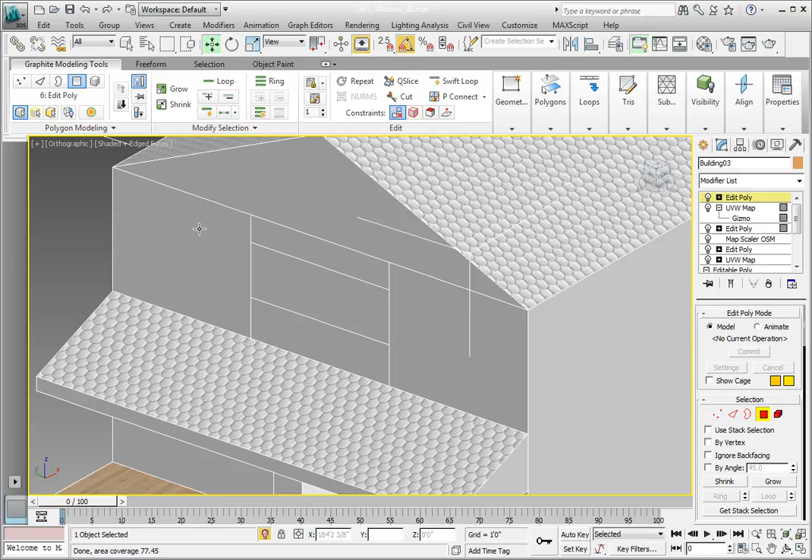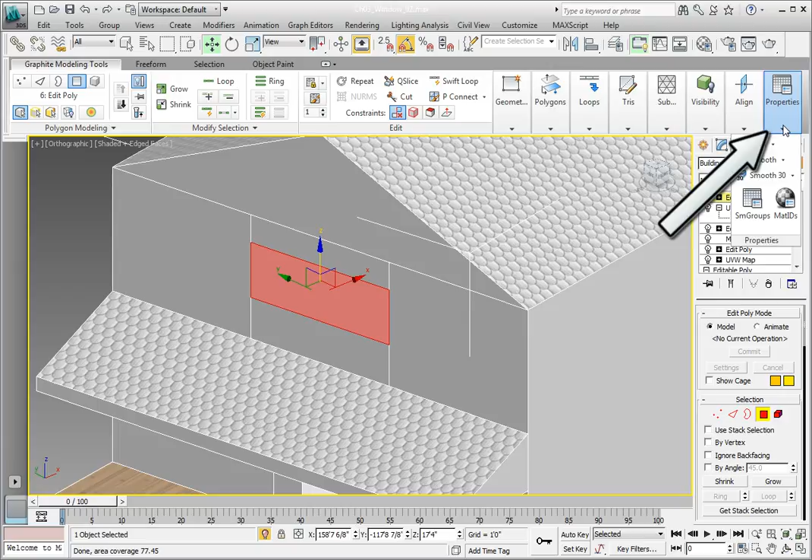This polygon is going to get a different material. Remember, we assigned all the polygons in the building a material ID of 1. So we will change the material ID for this polygon. In the Graphite Modeling Tools Properties panel, click the down arrow in the Properties title bar and click on the Material IDs option. We might need to drag the window into the viewport.

Click on the up arrow of the spinner for the Set ID and increment it to a value of 2. Go ahead and close the Material ID dialog. Now there can be a different material for the frame. The frame itself will be the same size all the way around the window. So we're going to use a tool called the Inset tool.

We are currently in Polygon Subobject mode. From the Graphite Modeling Tools Polygon panel, click the down arrow next to the Inset option and choose the Inset Settings from the drop-down list. Inset is available to us in the Polygon Subobject level and was not available to us in the Edge Subobject level. We will use this tool to begin to create our window frame.

When you first apply the Inset tool, the value is set to 1 inch. What this does is offset the polygon by 1 inch. It pulls the polygon inward by 1 inch all the way around. 1 inch isn't enough for what we need. So in the caddy type-in amount, set the value to 8 inches. Make sure you use the inch mark. Then press Enter to accept the value. And you'll see it now makes a frame 8 inches wide all the way around our window.

Since this is doing exactly what we want it to, we can commit this edit by clicking the check mark on the caddy. These new polygons are going to become our window frame, and the center polygon is going to become our window sash and glass. We now need to change the material ID of the center polygon to 3. That way we can apply a different material to this polygon.

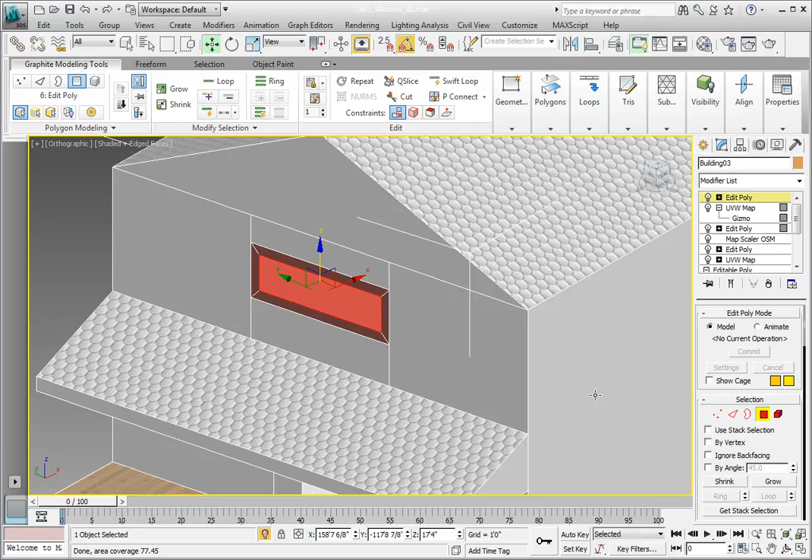Again, like we did before, using the Graphite Modeling Tools, click on the down arrow on the Properties panel and click the Material IDs option. In the Material IDs dialog, increment the value of the material ID by 1 to an ID of 3. Now let's start to detail the window frame a little bit. We're going to start by using the Extrude option.

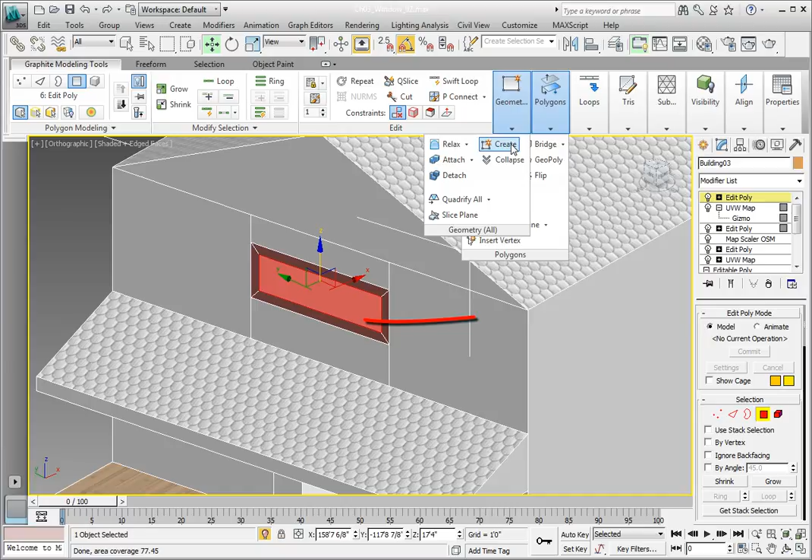Again, in the Graphite Modeling Tools Polygons panel, click the down arrow next to the Extrude option and select the Extrude Settings from the drop-down list. By default, it extrudes out by 10 inches, and you can see it also creates new sides all the way around. We don't want a height of 10 inches, we want a height of -3 inches. In the Height type-in, enter -3 inches. Make sure you use the inch mark.

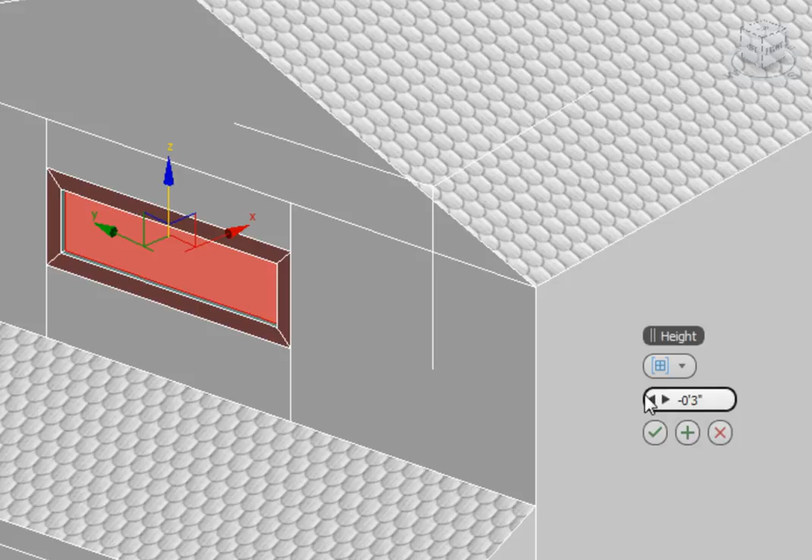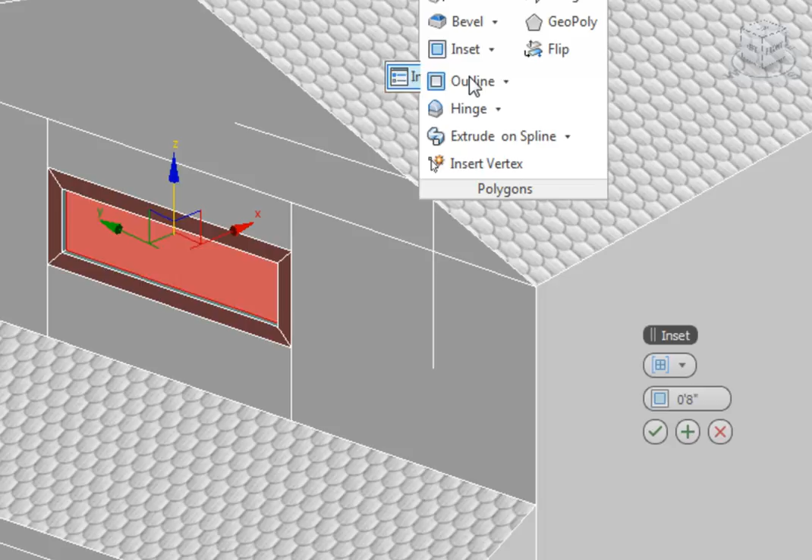Then press Enter to make sure it looks okay. Then we'll go ahead and click the check mark to accept this edit. That pushes our polygon inward a little from the edge of the window frame. This is the sash element that we're building. In the Graphite Modeling Tools Polygon panel, select the Inset Settings options again. Change the value in the amount to 3 inches this time. Press Enter to accept the change.

Notice we didn't give this value a negative because this value is only offsetting the polygon inward. Positive numbers offset this value inward. This will be our sash rail. Click on the check mark to accept this operation. This is now an object with 3 material ID numbers. One for the overall building, a second for the polygons that will become the window frame, and a third for the sash rail.

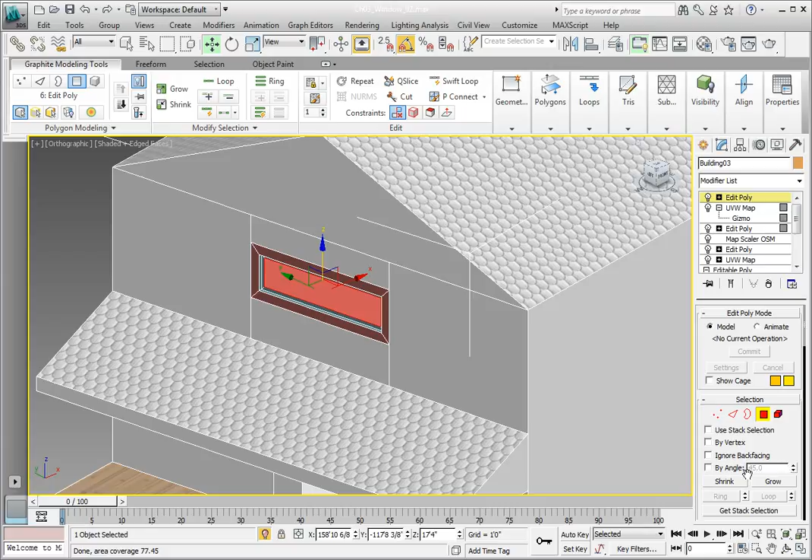We'll increment this version of the file. Click the Application button. Select Save As. In the Save As dialog, click the Increment button. Again, if it asks you to overwrite a file, go ahead and overwrite it.